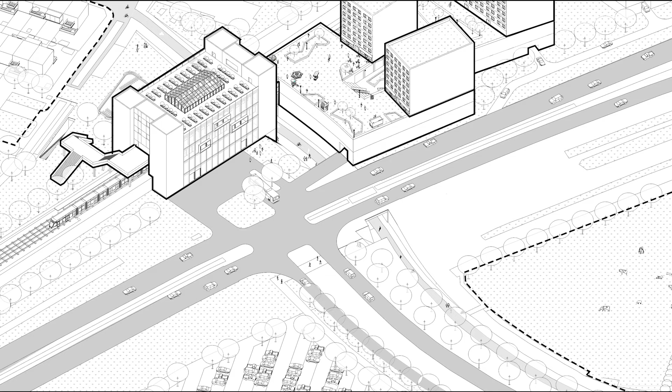Tomorrow's Garden City Station is an inclusive metro station design paying respect to the original design proposal for Schiebroekpolder, yet answers to the 21st century needs of its current and future users. The dualistic nature of the location, on one hand part of the rural hinterland, yet a massive connection point between two major cities in the Netherlands, makes Meijersplein a potential site for new social, spatial, cultural and environmental development.

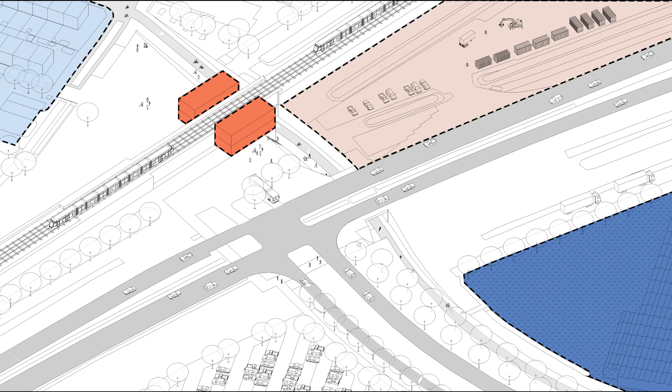In order to get a grasp on the different flows, uses and needs, we divided the area into 4 districts that all have promising opportunities. The project title, Tomorrow's Garden City, refers back to the multiple changes we want to accumulate over a time span of 10 years: a new proposed chain of food distribution for old and new residents, a more resilient neighborhood answering future climate scenarios, new neighborhood districts at waste space areas, and a hybrid station serving as a connector of the Garden City area.

Meijersplein sees itself in the midst of 2 opposite worlds, yet both worlds heavily rely on each other. The product flow coming from the harbor of Rotterdam provides the rural hinterland with substances for food production. One part goes back for international trading, the rest is distributed over wholesale companies throughout the Netherlands, making the Schiebroekpolder not only part of a transportation corridor for people, but also goods.

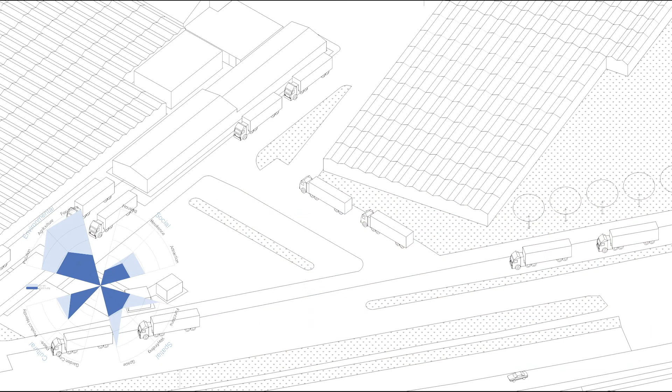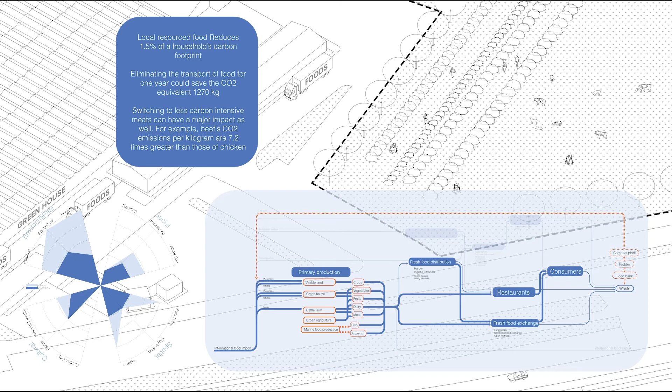Answering our goal of having 10,000 more residents in the area, making a total of 30,000 people, with growing possibilities, Schiebroek can benefit from the direct impact this food chain provides by taking part in a locally sourced fresh food exchange focused on more vernacular ways of producing.

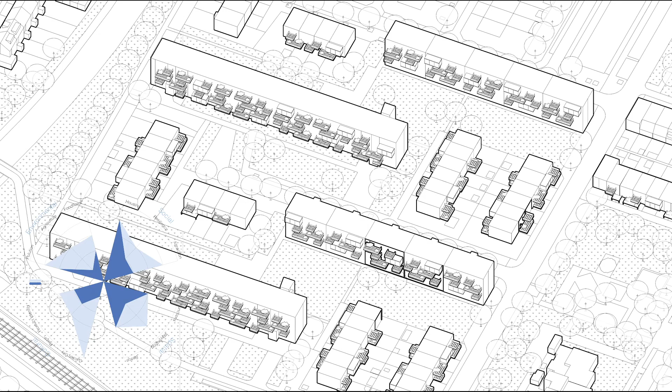The neighborhood design, originally planned as a modern garden city, was always overshadowed by the arrival of the airport and larger social housing flats. It will be made more resilient by adding new functional green, water storage solutions, and more individual outdoor space. From old oil field to Milieupark to residential area, a regeneration of waste space will be the first step to answer Rotterdam's ongoing housing issues.

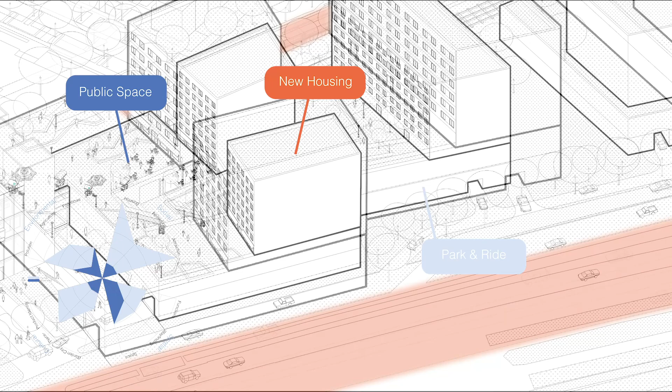Creating a new high-dense, lifted residential area in between 2 nuisance boundaries will make room for new public space, function, urban agriculture, and public and private gardens.

Meijersplein Metro Station, a small transportation node with no place identity, will be transformed into a hybrid station, serving as a physical and logistical connector between all districts.

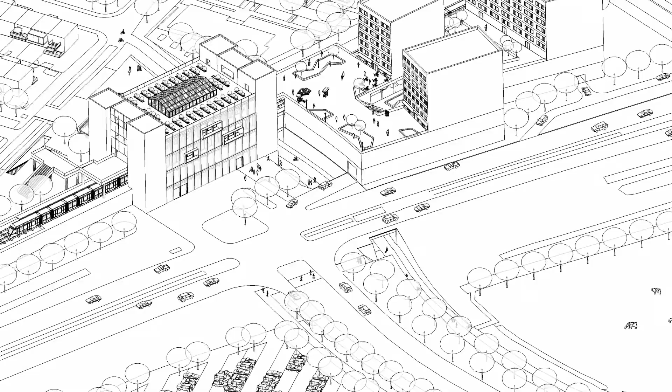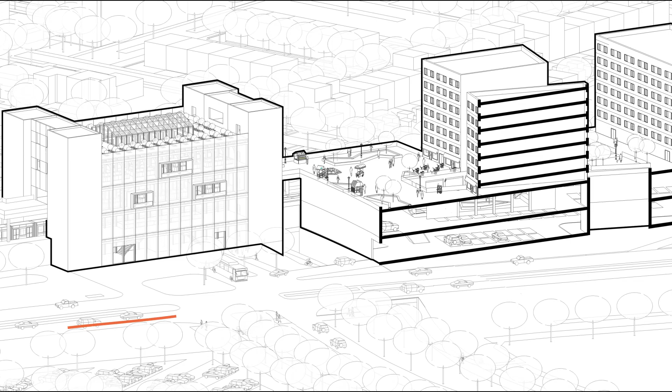New residents mean more logistic space for transportation purposes. Introducing a new car park and park and ride route under the new residential area not only answers the needs of the neighborhood, but also solves the problematic crosswalk travelers had to take from the original park and ride location. In this area we add a new transportation flow for goods, resulting in space for an additional bus stop and a new food flow to enter the building easily.

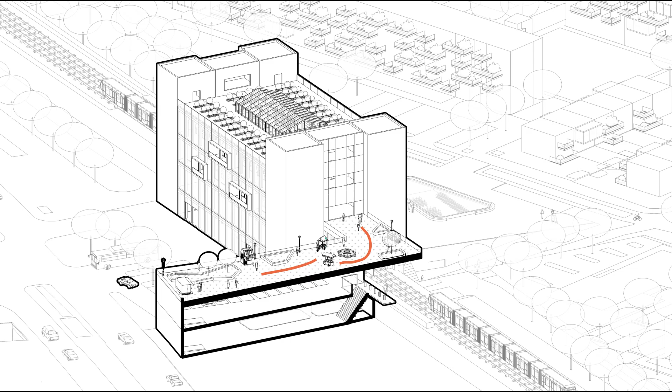The new park and ride is directly connected to the extended platforms of Metroline E, causing a smooth change in use of transportation methods. A public park on top of the garage with lots of greenery and food stands selling locally sourced products connects the new residential area with the station.

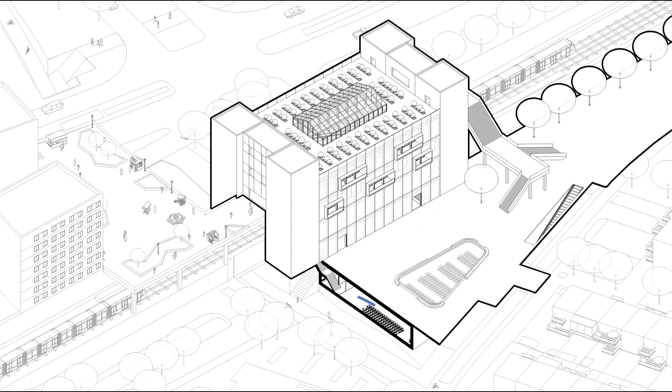We use the existing infrastructure, such as the bicycle tunnel, to our advantage, connecting it to the underground bicycle storage, shop, repair and share points. The basement is approachable from the north side, connecting to a beautiful singel leading the user to the village center, and from the west and east side by using the bicycle tunnel. The basement is connected indoors to the Metroline platforms again, creating a smooth change in use of transportation methods.

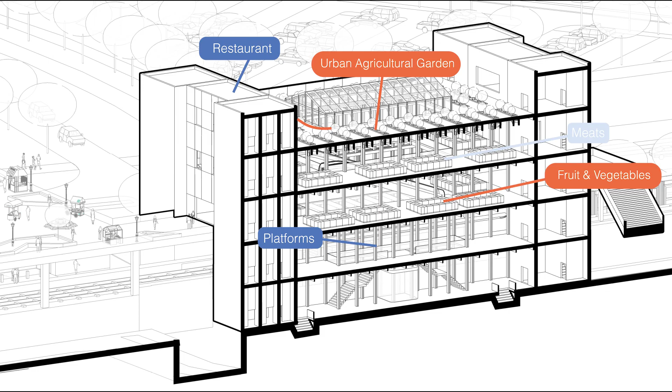The metro station will house a combination of a market hall and an urban agricultural garden. From the bicycle garage, the user can reach the entrance hall leading up to the extended platforms, where one can move through the 2 vertical service cores leading up to the 2-story floor market and rooftop garden.

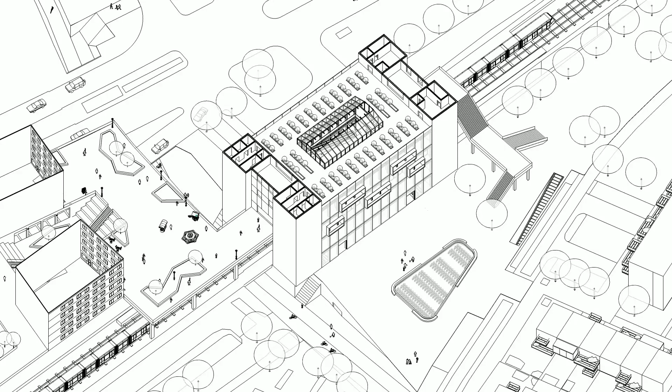To create a visual connection between the proposed market and the platforms, a glass core shaft is placed in the center of the building, making it possible to look up and down depending on your location in the building.

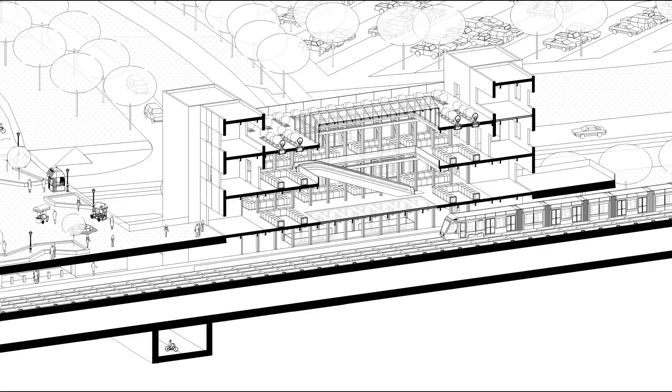In terms of technicalities, we looked into the characteristics of a greenhouse and implemented ways of natural ventilation from the metro platforms all the way up to the top garden, which houses a restaurant and a cafe that will process leftover products from the market which are too good to go.

To showcase the hustle and bustle in the station building, a greenhouse-inspired polycarbonate facade with indoor balconies opens up to the south and west side of the site.

Overall, Tomorrow's Garden City Station is an act of connecting individual patches of land into a rural-inspired urban fabric that serves the purpose locally, as well as for the cities of The Hague and Rotterdam.